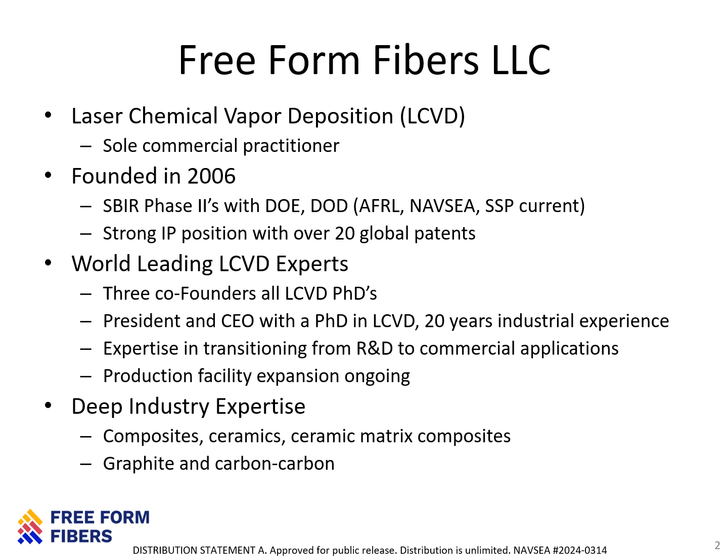The background for this project is a challenge from the Navy to develop higher performing, thermal shock resistant electromagnetic windows. Missile radomes and other electromagnetic windows are challenged by the increasingly extreme thermal, environmental, and structural demands of hypersonic flights. New engineered materials that exceed state-of-the-art capabilities are required to support the next generation of hypersonic vehicles. Silicon nitride is the next generation material candidate.

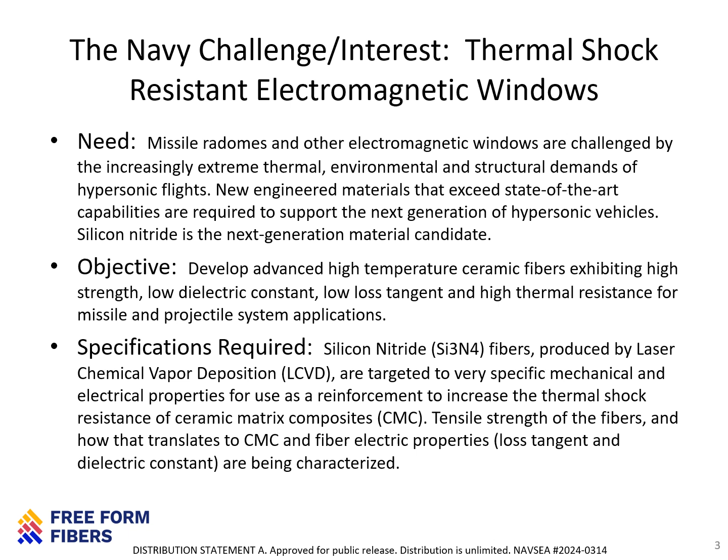The objective for Free Form Fibers is to develop advanced high-temperature ceramic fibers exhibiting high strength, low dielectric constant, low loss tangent, and high thermal resistance for missile and projectile system applications. Silicon nitride fibers, produced by laser chemical vapor deposition, are targeted to very specific mechanical and electrical properties for use as a reinforcement to increase the thermal shock resistance of ceramic matrix composites. Tensile strength of the fibers and how that translates to ceramic matrix composites and fiber dielectric properties are being characterized.

Existing electromagnetic windows are limited by the properties of the materials. Brittleness in ceramics, temperature in glasses, or toughening inclusion distribution in nanocomposites are commonplace in the marketplace. Each brings challenges, whether thermal performance, processing, or a sacrifice in desired properties. Creating a reinforcing fiber to enhance thermal shock resistance of brittle, monolithic, higher temperature performing ceramics is desired. Demand exists across all Department of Defense agencies, led by Navy platforms, but also desired for Army, Air Force, and Missile Defense Agency vehicles.

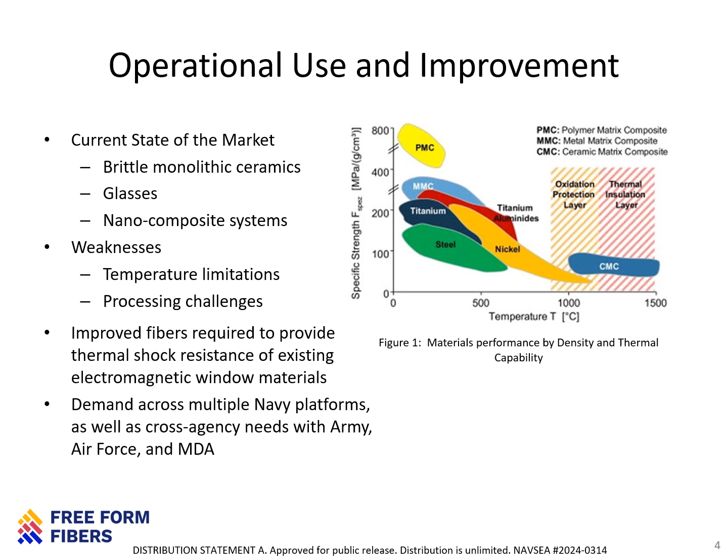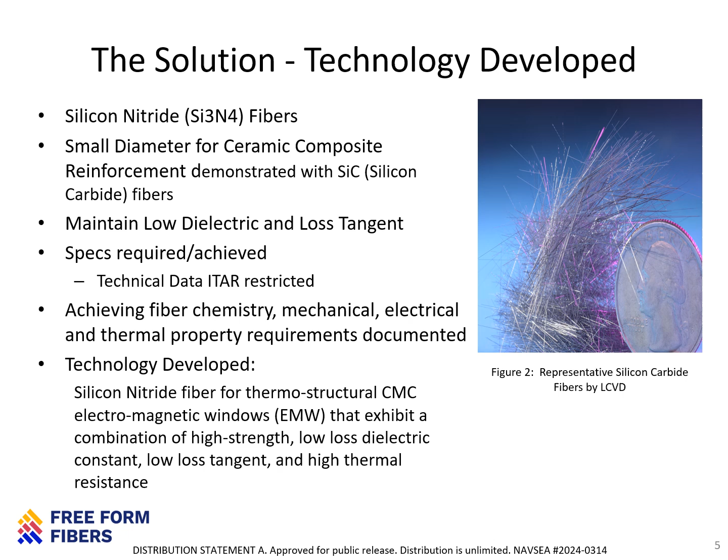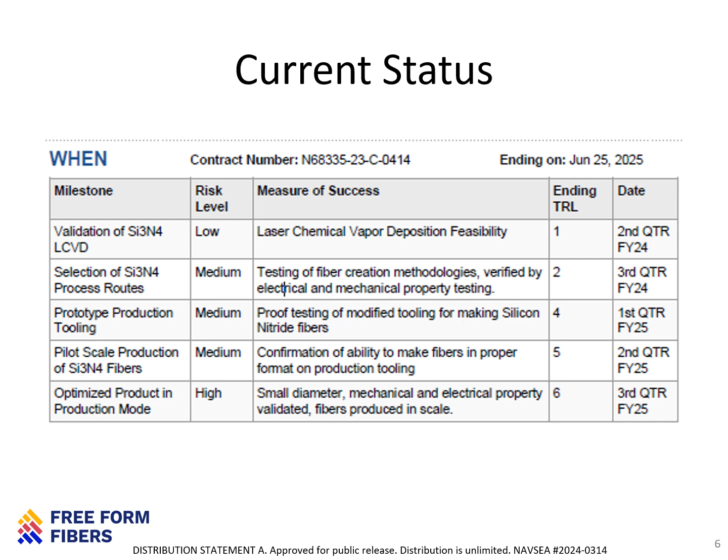The solution under development at Free Form Fibers are silicon nitride fibers in a small diameter, with desirable electrical properties, such as loss tangent and dielectric constant. The end result is a silicon nitride fiber for thermostructural CMC electromagnetic windows that exhibit a combination of high strength, low dielectric constant, low loss tangent, and high thermal resistance. Milestone-based accomplishments, moving the technology readiness level from 1 to 6, are ongoing. Various steps of materials modification, testing, and analysis have been performed, each growing larger in scale and scope.

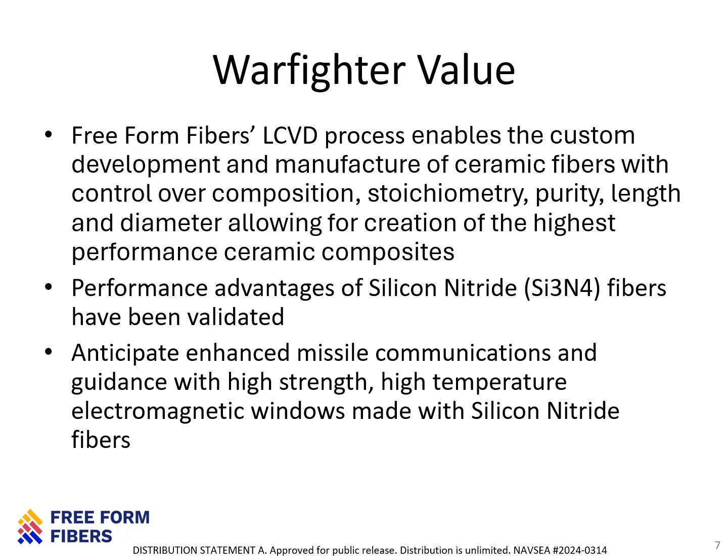Warfighters will benefit from the anticipated benefits, such as enhanced missile communications and guidance with high strength, high temperature electromagnetic windows made with silicon nitride fibers. Free Form Fibers' LCVD process enables the custom development and manufacture of ceramic fibers with control over composition, stoichiometry, purity, length, and diameter, allowing for creation of the highest performance ceramic composites. Performance advantages of silicon nitride fibers have been validated.

Free Form Fibers has invested significantly in developing commercial relationships at levels ranging from academic to industry prime contractor to test, characterize, and further evaluate our materials. Focusing on DoD prime contractors, these relationships include Raytheon, Lockheed Martin, Northrop Grumman, L3Harris, and Boeing. In addition, materials subcontractors who supply the system prime contractors such as Exothermics, TDA, ATC, and SINTX have been engaged for materials and processing support ranging from sample preparation to testing and analysis. These subcontractors will also help pull through these materials advancements to the system prime contractors. With positive testing and characterization results, a transition to the Navy fleet would follow normal materials qualification and implementation protocols.

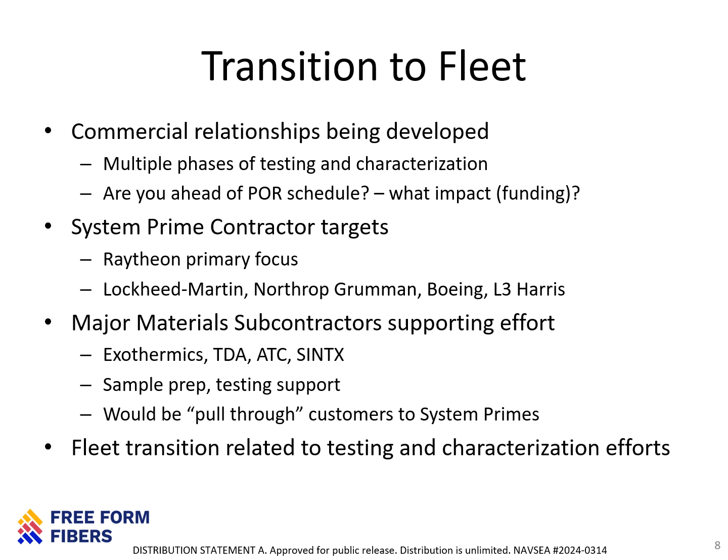Consistent with our company objectives, our transition plan involves a multi-step model. First, we are working to build awareness at the Navy DoD level. We are starting work with system prime contractors and leading materials fabrication subcontractors. Research, development, testing, evaluation, characterization, and scaling with suitable test articles and prototype parts is ongoing with these parties. The company desires to transition the technology to make silicon nitride fibers at scale to supply a program of record. Appropriate qualification steps and hurdles to competitive substitution will be undertaken to achieve the company's goal of supplying critical materials with unique properties, produced via a technology that is patent protected.

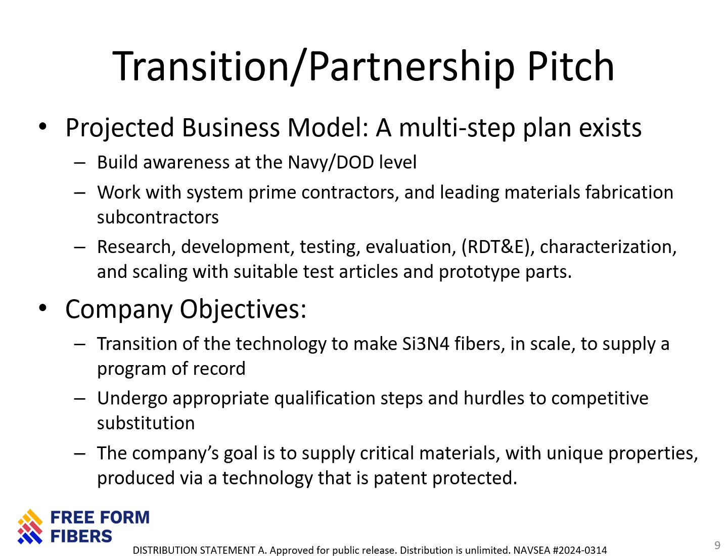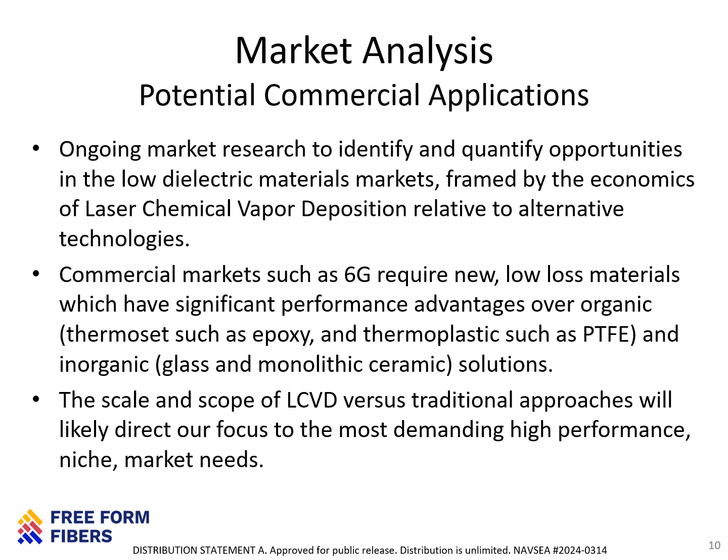To wrap things up, we are a small company that is investing in our future. We have achieved ISO accreditation, preparing the operations for meeting the needs of a program of record.